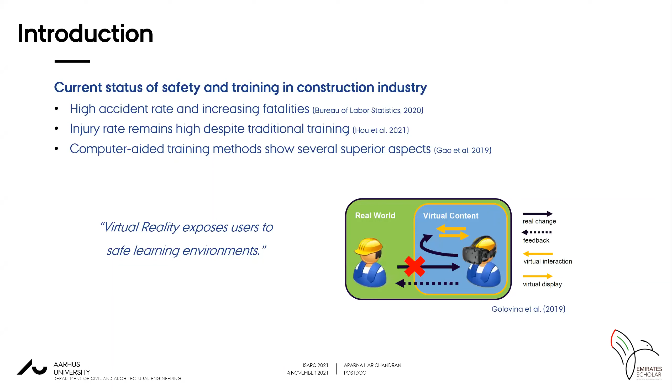Recent study shows that computer-aided training methods show several promising aspects in this arena, especially virtual reality-based training methods. These methods offer immersive and interactive experience for the users, which develops interest in the participants and enhances their safety performance.

In addition, there is an option for collaborative training through multiplayer virtual reality games. Recent study shows that we can collect runtime data and assess the performance automatically by the end of the game, and based on this, we can give personal feedback to these participants, which will eventually help them improve their performance.

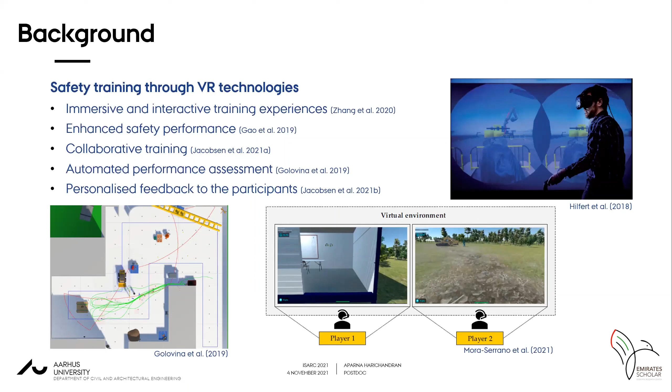Even though VR training has several promising and effective aspects, one of the major criticisms is that they lack the very complex tasks that appear in actual construction scenarios. So the main objective here is to create tasks relevant to the training scenarios for the work we are actually experiencing in real life.

So the research objective is to propose a digital twin framework that dynamically generates and updates a VR-based learning environment, and uses that for construction safety training.

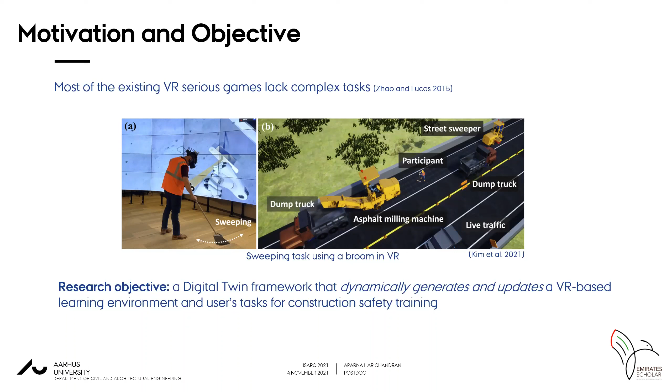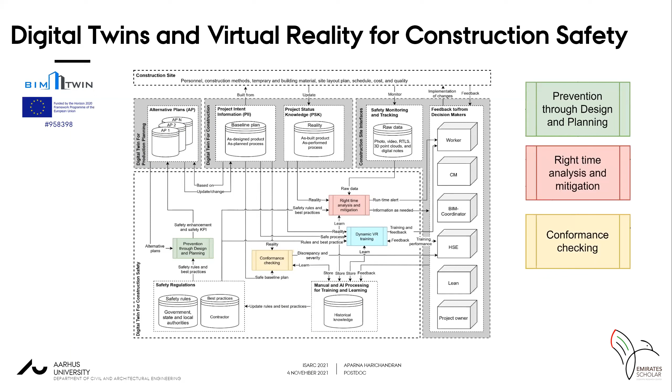This is an overview of the digital twin for construction safety. We have 4 major components: prevention through design and planning, right-time analysis and mitigation, conformance checking, and dynamic VR training. Dynamic VR training is the focus of the current study.

It starts with creating training scenarios based on the project intent information and project status knowledge we receive from the digital twin. Then selecting appropriate training scenario based on the upcoming work, and updating the VR games based on the progress of the work and also from the feedback of the decision makers and the performance of the laborers.

Once we update the game and present it back to the laborers, we'll subject them to the virtual reality safety training. During this training, we will collect automated data related to safety violations.

This data will be analyzed and used for assessing their performance, and we can give feedback to them based on their performance in which area to improve.

Again, based on the performance and how the work progresses, the VR game will be further modified and updated. During the entire life cycle of the project, every day before going into the work, the workers will be subjected to VR training and they will be better prepared for their work.

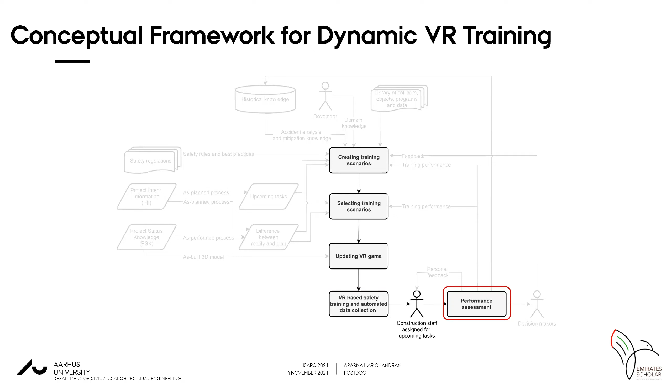Let me go into the detail, starting with creating and selecting the initial training scenario. Initially, before the commencement of the work, we don't have work already completed.

So we have the as-designed models and as-planned processes. For creating a training environment, we require geometrical information, training tasks, hazardous zones, and objects of interaction.

Initially, we use the as-planned details, and later on, we use as-performed built products and what has been performed so far. Based on the progress, we will decide the upcoming task.

When it comes to the hazardous zone, we use expert knowledge, historical knowledge from previous projects. Based on the safety regulation, we identify in each training scenario what are the hazardous zones, and we will have a library of colliders, objects, and programs and data which will help us create interactable objects to rectify the accidents or potential accident zones in the training scenarios.

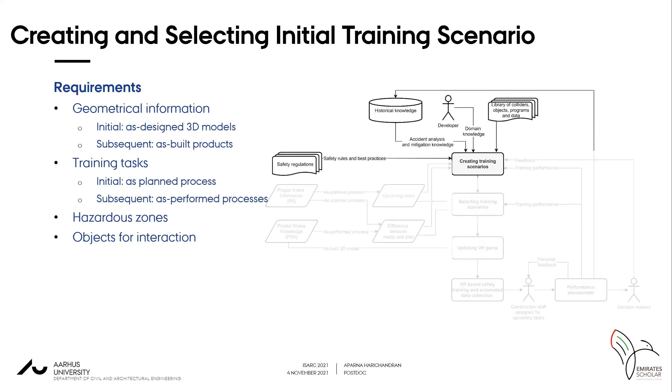For example, you can see here the initial geometry of the particular training scenario is based on what we have in the plan from the initial BIM.

Then in this particular case, we can see that a part of the work is already completed. Now the next work is the plastering work. We can see some workers here, and we can also identify that there are some accident situations associated with it.

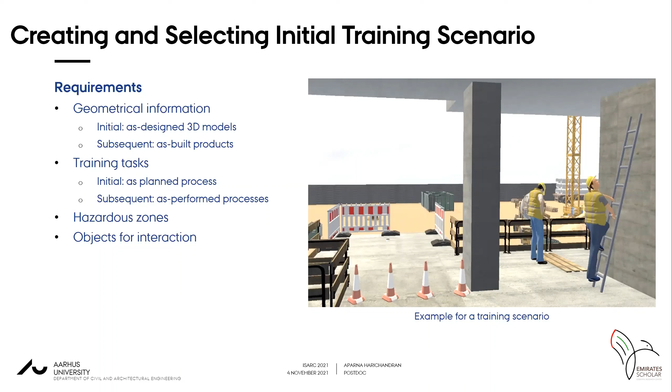For example, the open leading edge here. How do we fix that? The laborers will be provided with some objects they can interact with, for example a guardrail or a barricade, so that they can pick it up, interact with it, and fix the unsafe condition which occurred in the scene.

VR-based safety training and automated data collection.

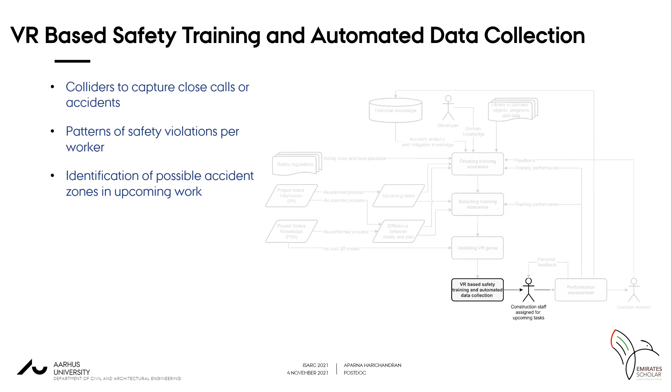During the training, each scenario will have colliders to capture close call events or accidents. These colliders are programmed to identify the proximity of the participant with a dangerous situation or any kind of close call event. This data will be collected per participant to analyze what kind of accidents a particular worker puts themselves into, since each person will be distracted in many ways. Based on that, we give personalized feedback to them, and we can also identify potential accident cases in upcoming work.

For example, the leading edge will provide a data collection collider. If any worker comes in proximity to this collider, the data will be recorded, including what time and how many times the worker passes through this particular leading edge. So we will identify close call events and potential falling hazards associated with that.

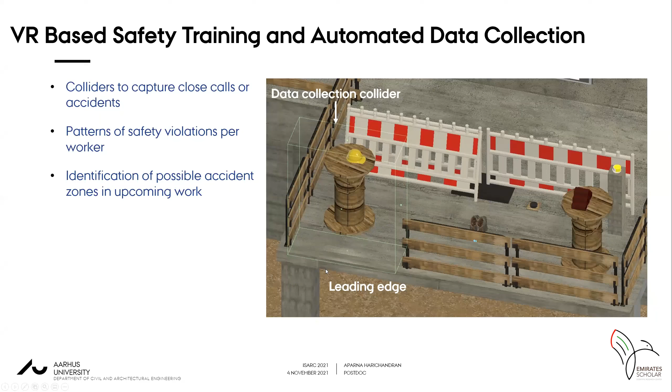Performance assessment: based on the data collected, we have runtime data analysis through a background program within the gaming environment, and the assessed performance is given to decision makers to decide which tasks need improvement and how many times a worker has to be subjected to further training.

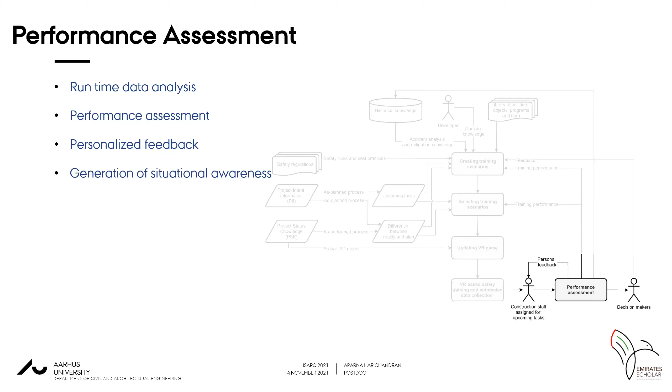We potentially expect that laborers subjected to this kind of environment will have better situational awareness. These are some examples of the performance assessment.

Updating training scenarios as the work progresses: once the initial set of training is completed, the existing VR training environment will be updated based on the workers' performance and decision makers' feedback.

For example, if there are any undetected hazards, such as cluttered objects, it may not seem like a hazard, but it might interfere with the work, causing tripping or falling. These kinds of undetected hazards from previous scenarios will be incorporated into further training.

If any of the safety solutions seem unfamiliar to the workers, they will be given additional training. And if any of the existing solutions in the training environment prove inadequate, we will further improve the solution and training scenarios as well.

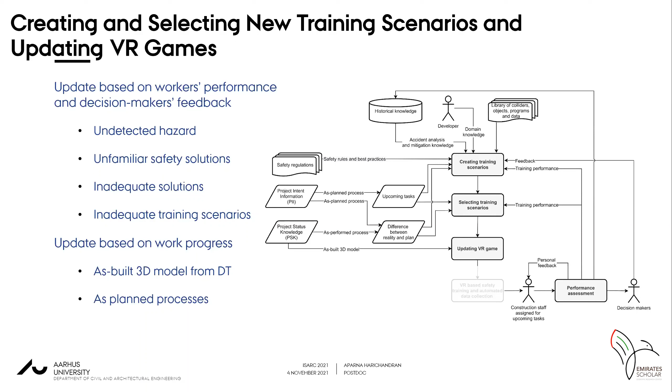As the work progresses, the training environment will be overlaid with the as-built 3D models from the digital twin, and the tasks will be updated based on the planned processes and completed work.

These are some examples of the training scenarios. The participants will see examples like this in an unsafe scenario, and they will be given objects to fix it to a safe situation, something like that.

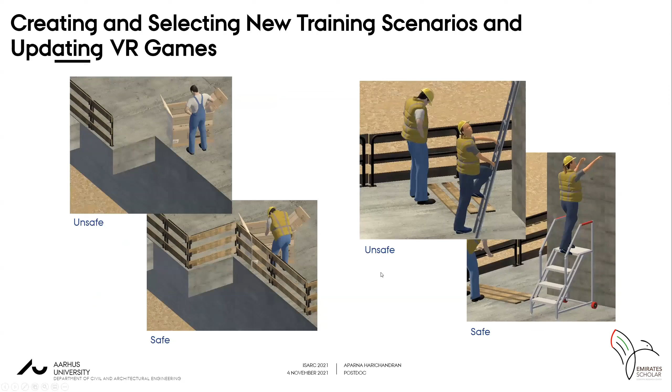Conclusion: in the current study, we propose a new concept for integrating virtual reality training with information streams from the digital twin. This includes project intent information, project status knowledge, safety regulations, and historical knowledge.

So the workers can be trained in a realistic training environment with tasks relevant to their assigned work. Since the worker will be subjected to a similar work environment to the one they are about to go into, their performance will be potentially improved.

In addition, this dynamic VR training will be mutually beneficial to the digital twin for construction safety. The periodic data stream from the digital twin improves the training scenarios, while the training scenarios prior to the work help identify conflicts such as conflicts in site layout, resource allocation, etc.

Challenges and future work: one major challenge is the technology readiness level of the construction industry. Currently it is inadequate to implement this procedure, but in the future we can expect improvement.

Also, to create realistic training and management, we need detailed high quality data as the work progresses, and implementing this is computationally expensive and economically demanding.